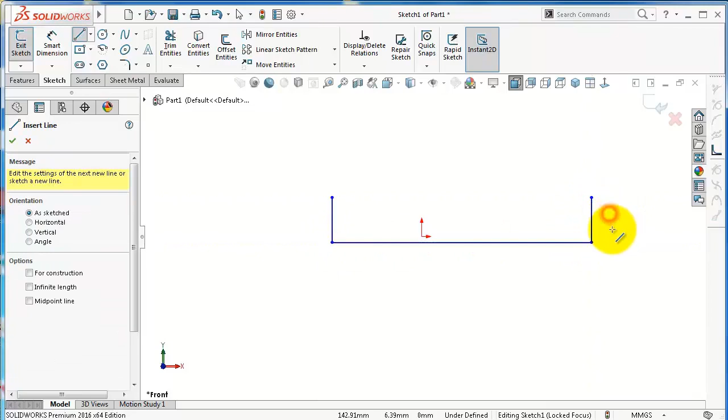For the bottom part, make midpoint and dimensions: 80, 9.25. This side is equal to this side.

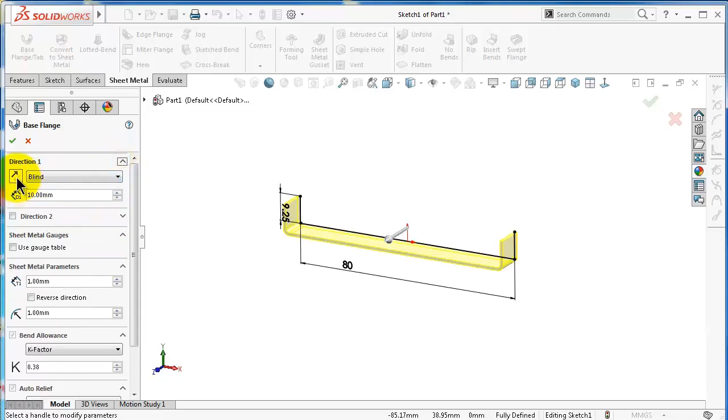Now go to sheet metal, base flange, and extrude it for 150, thickness 0.75, bending radius 0.25, K factor 0.38.

And the relief rectangle - these are the basic information and it will be used automatically for the next features. When we are done, click OK. So this is steel, and here in the appearance we can make it brushed steel.

On the base flange, let's just make sure that the base flange is outside, as you see over there.

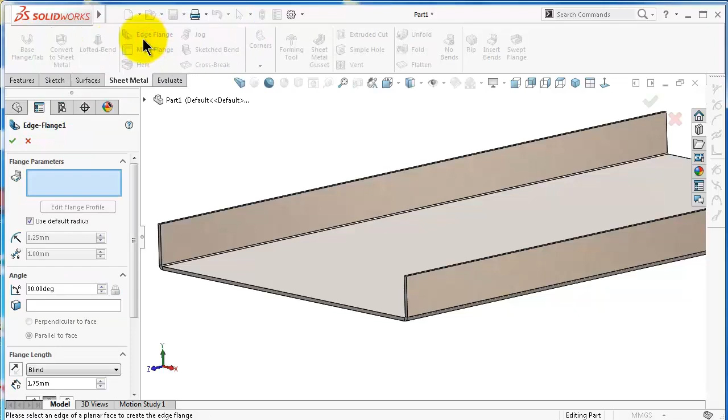Now we need an edge flange on this side. Go to edge flange, select this edge and make it a length of 38.75, and make sure the flange position is inside, as you see over there.

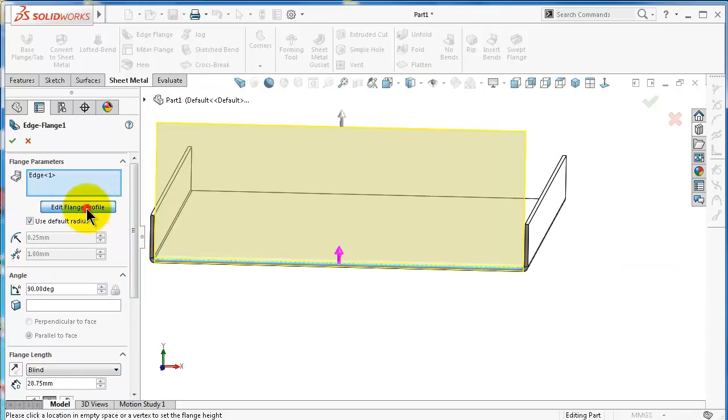And here the relief is rectangular. Edit the flange profile and give it a distance in this line to this line of 0.8. The same over here.

And this side is 38.8. And before finishing the sketch, we can do one more thing. Instead of making it a separate command, we would like to make a cut over there for another edge flange.

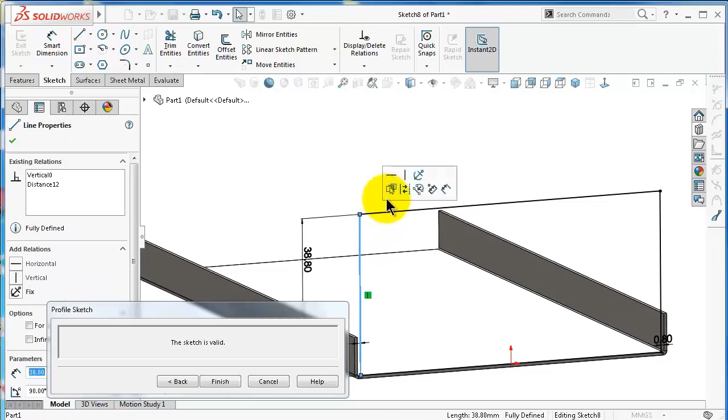So click on that line, make it for construction, and this line make it for construction as well. Normal To, and draw these two lines and give it a dimension of 12, 11.75, and here 0.8, then connect the rest of the lines.

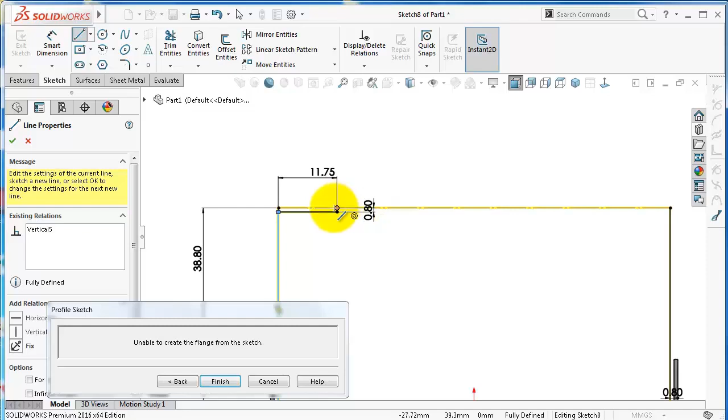So you notice the sketch is valid. Click finish. So now we have the edge flange with a relief over there and the cut here.

And here we would like to make another edge flange. Pick edge flange and select this edge. Edit flange profile Normal To. Here the dimension is 8 millimeter.

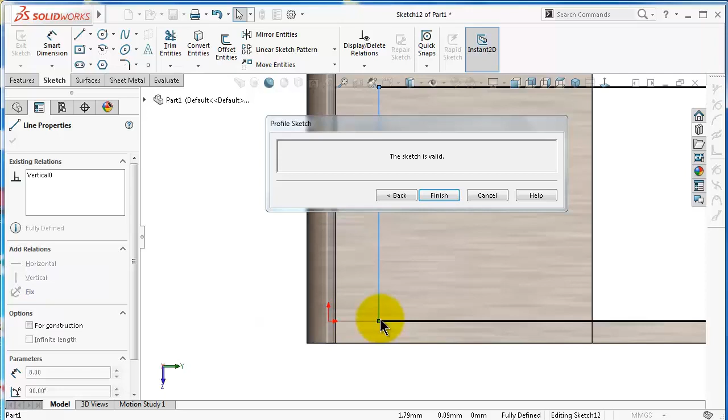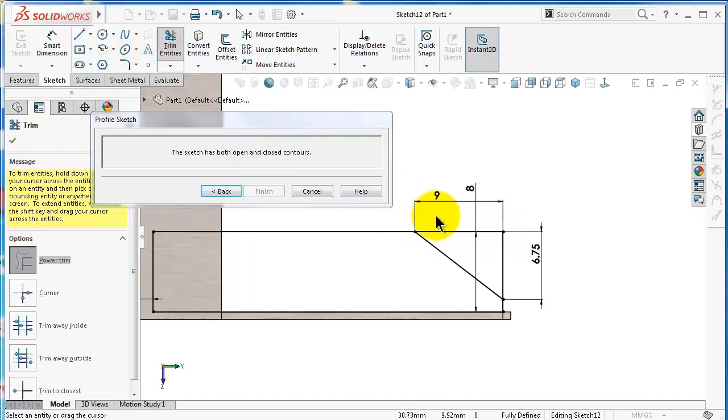And here make a gap of 0.8 millimeter. And we would like to make a cut over there, 6.75, and this distance is 9, and trim the rest. When you are done, click finish.

Just make sure that the edge is material outside. Click OK.

And here we need another edge flange. Select edge flange, select this edge, and edit flange sketch normal 2.

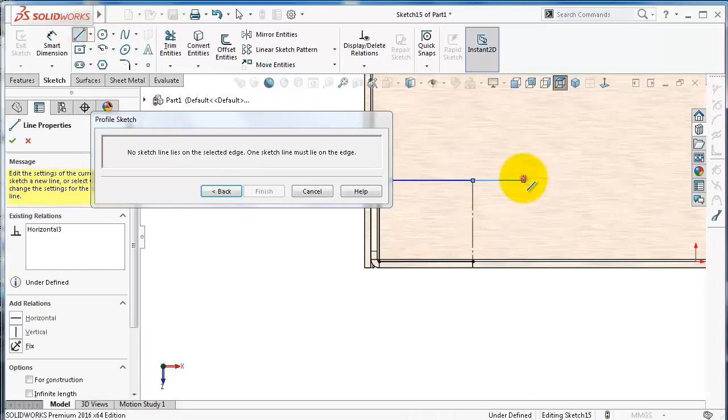The place of this line is correct, and let's make this for construction and draw another rectangle over there.

Make a gap of 0.8, and this line 1.25, and this distance 15.5, and this make 10.

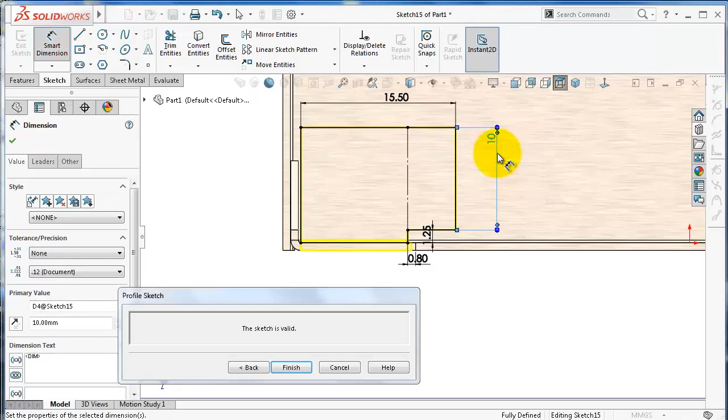When you're done, click finish and make sure the edge is material outside. Click OK.

Need a miter flange on this side. Click sketch normal 2. Pick a line and draw this shape, and give it a dimension of 45, 4, and here 10.

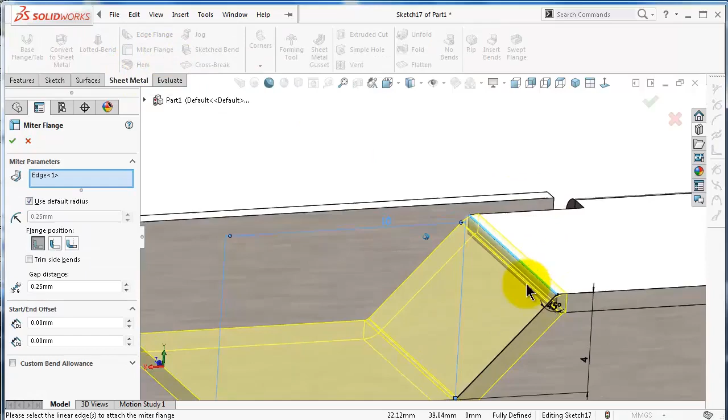Go to sheet metal, miter flange, and you will notice it is extruded automatically to the edge. Click OK.

And here on the main edge flange we need more cuts. We can make them on the face, or we can edit the main sketch over there, so depending which one is easier, you can choose. I can again pick the main edge flange, edit, normal to add some cuts.

And here, construction, and add another cut over there. Now the sketch is valid.

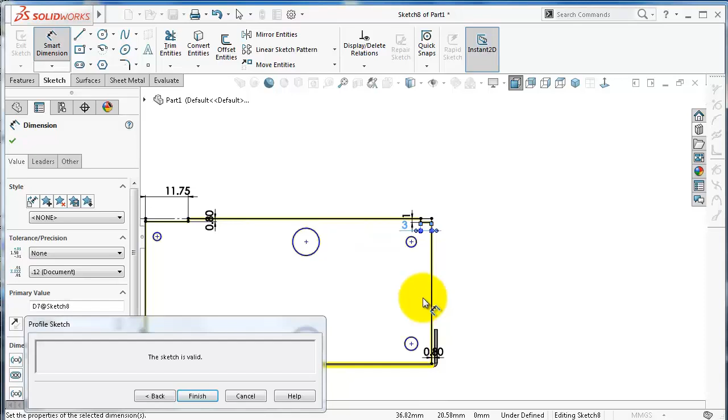Here make 1 millimeter, here 3. This one make it 2.5, and this 3.5. Distance from here, this one 25, and from this distance to here 4, and here 4 as well, and then you can add relation to define the sketch.

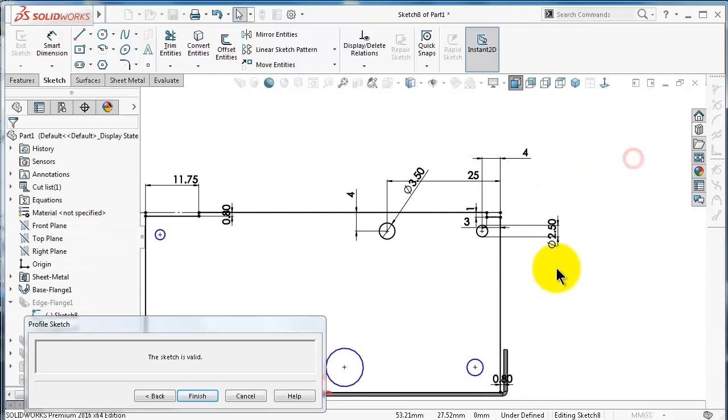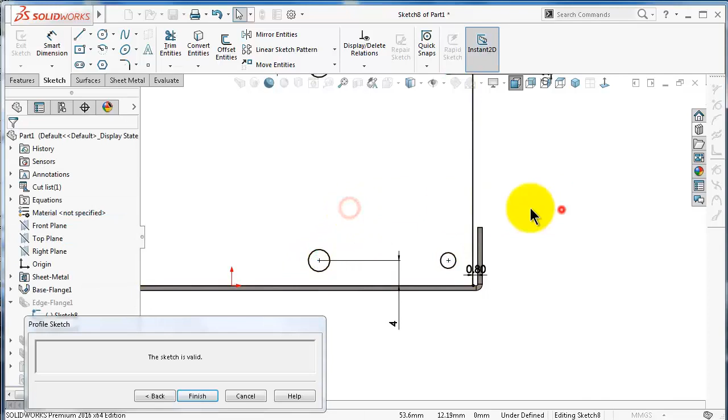So now the sketch is fully defined and we have the cuts. Click finish. We could also do the same by adding a simple hole, but it might be easier to make it on the same sketch.

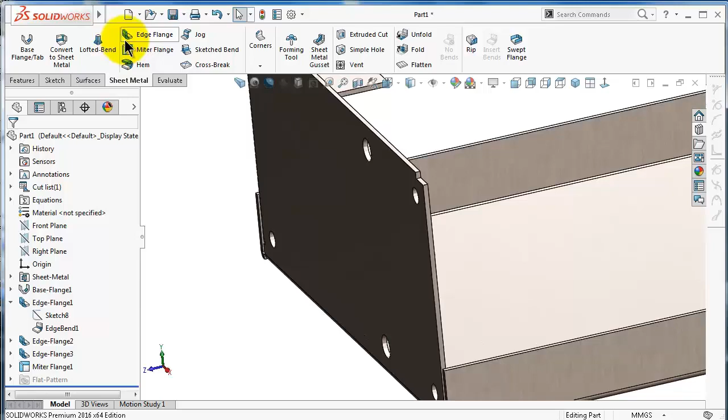And here add another edge flange, edit the sketch normal to, and then make a gap, define it with 2 millimeter, and the length 30 millimeter. Click finish. Let's make sure that is outside.

Again, edit and make it material outside. And here we'll add a fillet for this sharp edge. Go to fillet and make a 2 millimeter fillet over there.

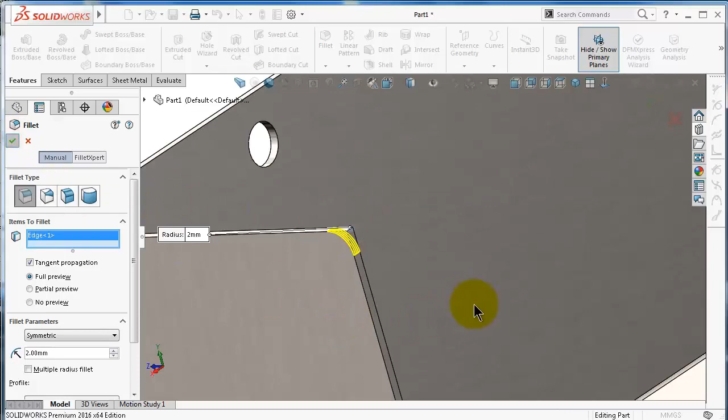And now we will make some holes for fixing the second chassis, the top chassis. Click on this plane, sketch, normal to, and draw a circle over here, 2.5.

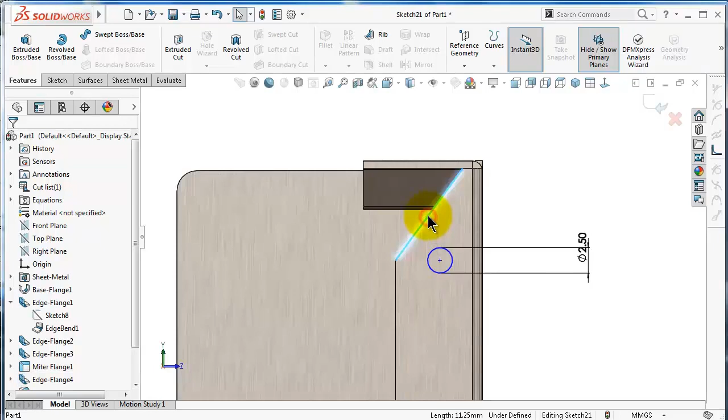Select this point, this point. Here select midpoint, or it is already selected. Select this edge, select midpoint, select this, make them vertical.

Go to sheet metal, extrude cut through all. Click OK. And here we can add one more hole by drawing a circle or simply linear pattern.

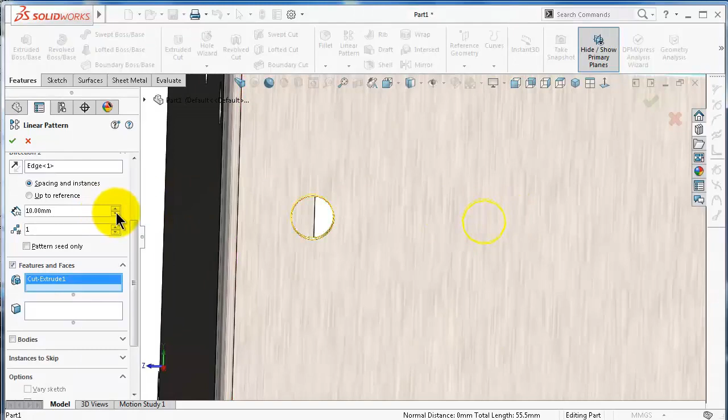This hole direction is this edge over there, and quantities to feature this hole and make it 10 millimeter over there. Click OK.

And now we need a similar edge flange on the other sides. So first, let's make sure that the first edge flange is mid-plane extruded, edit feature, and here make it mid-plane. So this process will save us from creating a new plane.

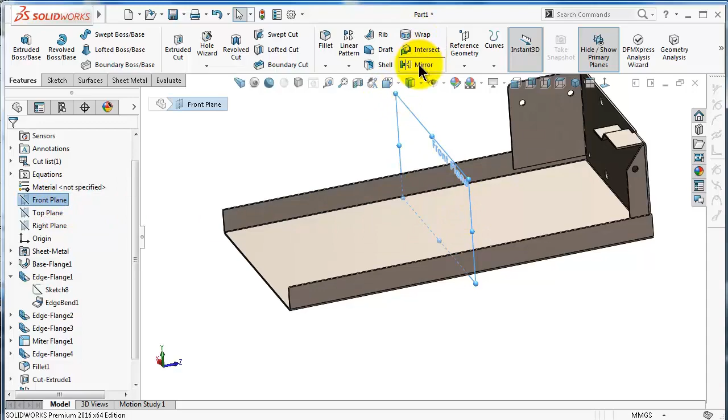Go to front plane, mirror, and let's pick the edges that we want. First, we need this edge and this edge, and that's it. Click OK. So the edge flanges are able to be mirrored.

Unlike other features in sheet metal, they cannot be mirrored and should be created individually. We discussed this in the previous tutorials in this course.

And on the top there, we will add a 3.5 millimeter edge flange. Go to edge flange, select this edge, and make sure the material outside. The length is 3.5. Click OK.

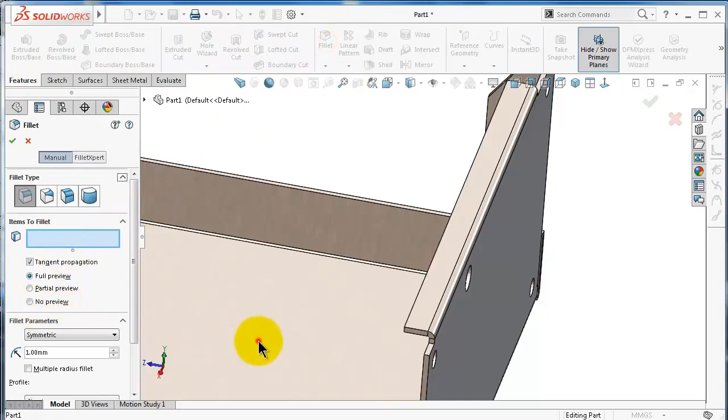And add a fillet of 1 millimeter around the sharp edges. Feature fillet, 1 millimeter. Okay.

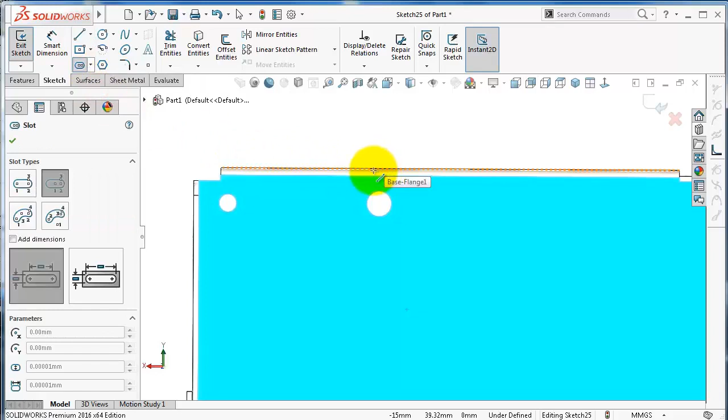And here we would like to make a cables hole. So let's draw a slot, center point slot, and make it to be in the center of, and here make a dimension of 10 millimeter and 10 millimeter over there, and here make it 16 millimeter.

And one more cut to add. Select center rectangle and make a rectangle over there, tangent with this edge or collinear, and this one is 27.5.

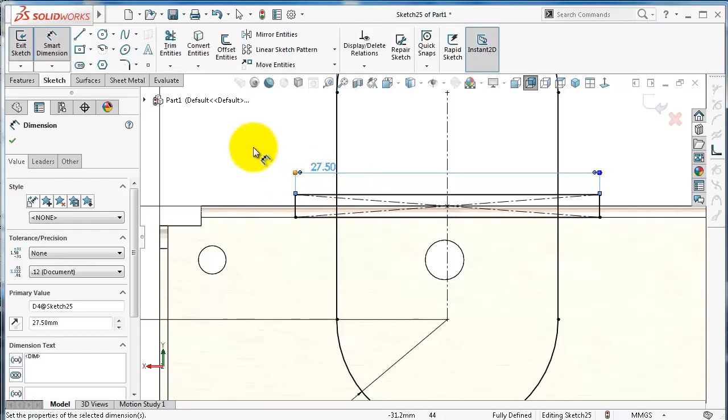So extrude cut, sheet metal extrude cut, select this area and this area and this area, extrude cut 10 millimeter, and here we can make the distance from the center of the slot and the edge 27.5, so that we have chance to make another cuts over there to fix the second chassis or the top chassis.

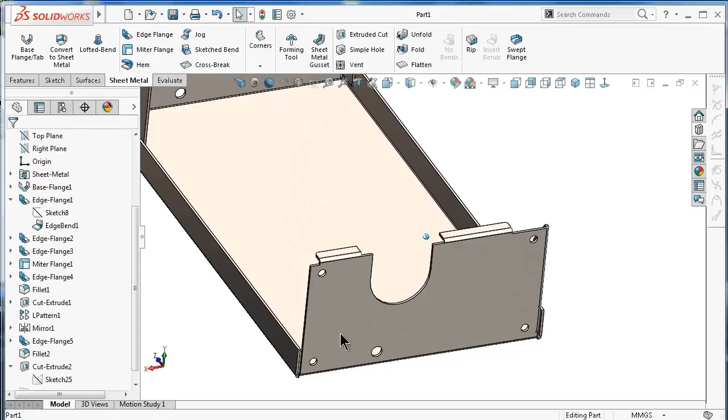And here we would like to make some ventilation slots. Click on vent, click on that face, make a sketch normal to, select center slot and draw slot, and define it with some dimensions, radius 1.25, and this is 6.5, and from this edge to this edge 7.5, and from this point to this edge also 7.5.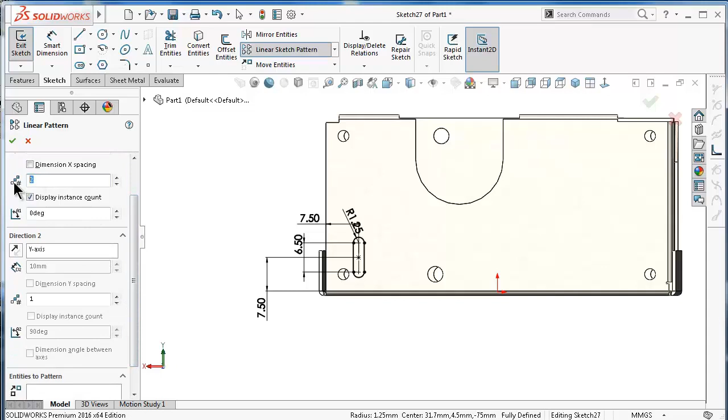Go to the, and here go to linear sketch pattern, and we need to fill that surface with slots. So let's make the 7.5 the distance between, and let's make it 10 instance or entities to pattern this slot.

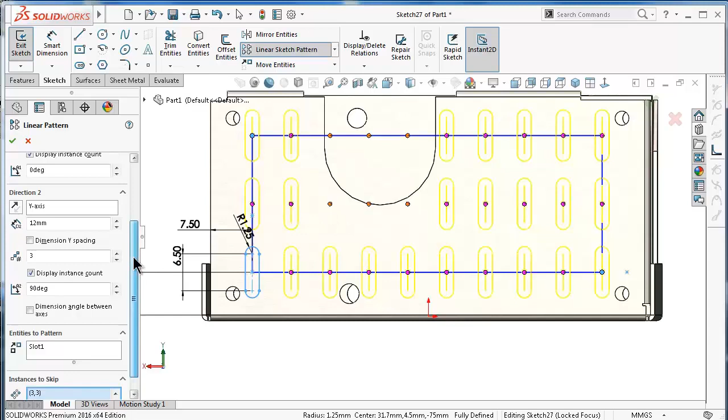So here the distance we can make it 7, and in direction 2 we can make 3 lines of pattern, and the distance we make it 12, and we can skip the unwanted pattern, this one and this one. Here we can try to make it 7.1. That looks better.

So we can skip more instances over there. Can skip this slot and this slot, and make distances 7.5, and we can skip this one over there. When you are satisfied with the shape, click OK.

Now add a little dimension over there, and over there, that would define the pattern. Click OK. Now the pattern is fully defined. Go to sheet metal, extrude cut, link to thickness. Click OK.

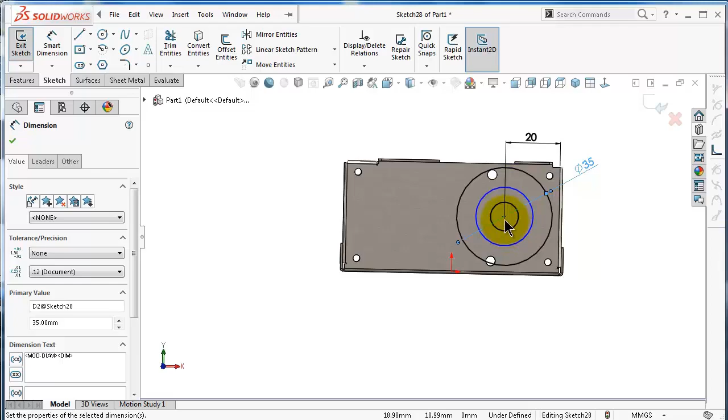On the other side, we will make the ventilation hole. Click on that face, start a sketch, normal to, and draw 3 circles. First, make a distance from the center of the circle to the edge 20 millimeter. Select midpoint and the center, make them horizontal. Here the outside diameter should be 35 and this distance between the center to the edge is 20. So we need to fix the place of the hole over there.

Go to normal to, and here make it 35 instead. So let's check. So now it is correct.

So again, edit the ventilation sketch, normal to, and here should be 25 and the last circle 15.

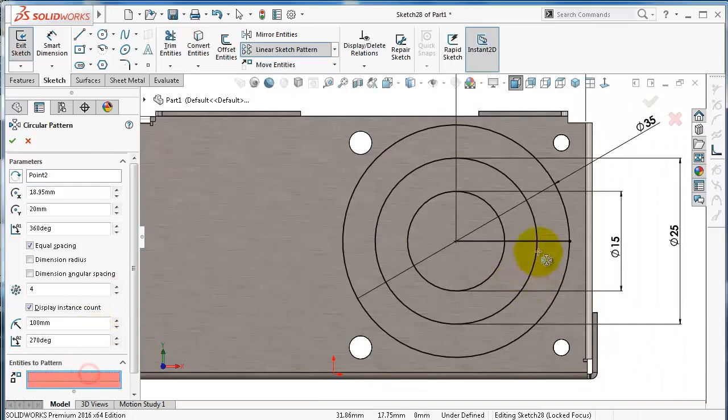Now let's make lines for the spars. Select line, select center point to the outside circle and circular pattern the lines. So the direction or the center of circular pattern is the point over there, and entities to pattern this line and make them eight. Click OK.

Now go to sheet metal, vent. As we learned how to use it, the boundary is the outside circle. As you notice now, it is already got a cut, and the ribs, let's make the...

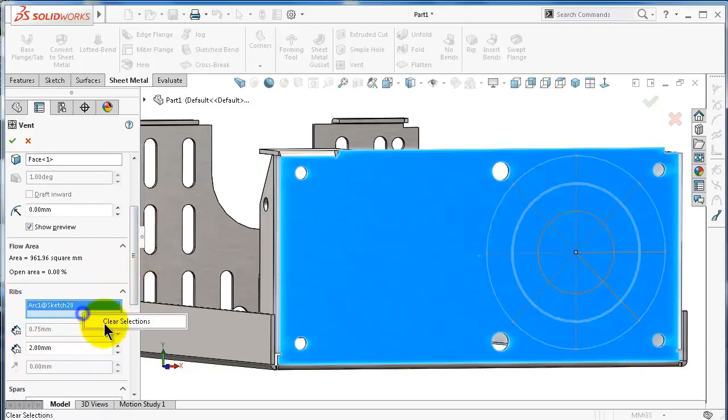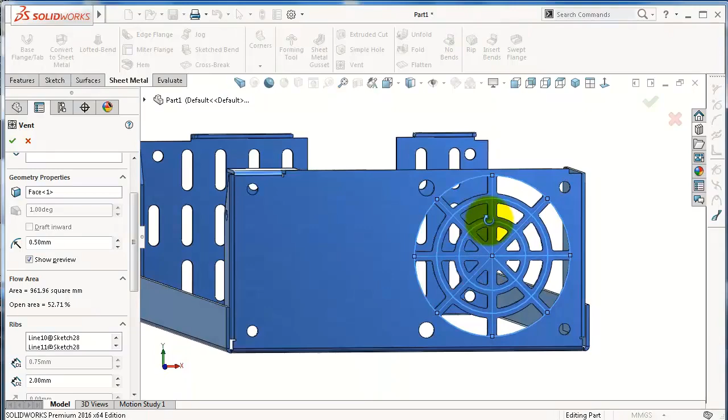And the ribs, let's select the lines, and for the spars we can select this circle and this circle, and we have 2 millimeter spars and 2 millimeter ribs, and define a fillet of 1 millimeter, 0.5, and click OK.

And hide the sketch. So this is the ventilation.

Now we will make some mounting holes on this chassis to mount the second chassis. Go to this surface, start a sketch, normal to, and draw 3 center point rectangles in the middle of each edge, and a third one over here. Make the edges of rectangles equal.

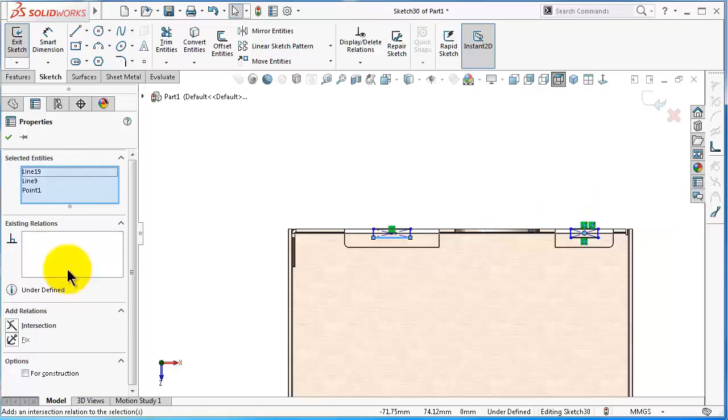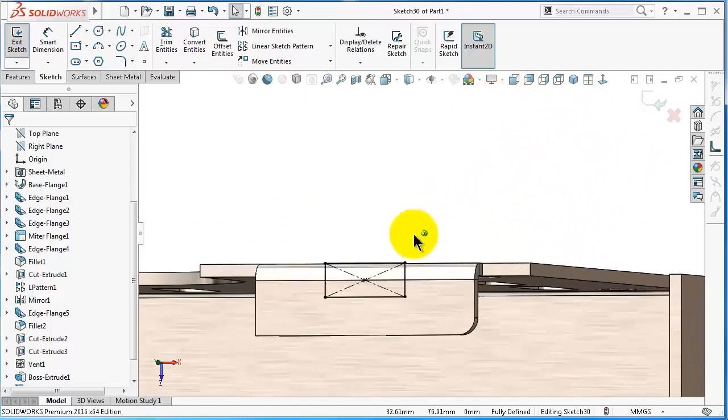Give it a dimension of 5 millimeter, and the second side of the rectangle is tangent or collinear with the edge of the chassis, as well in the rest of rectangles. So now they are fully defined.

So extrude them. Go to sheet metal, extrude cut to this surface. Extrude to surface and select that surface. Or better, this surface over there. Click OK. So now we have the mounting holes over there.

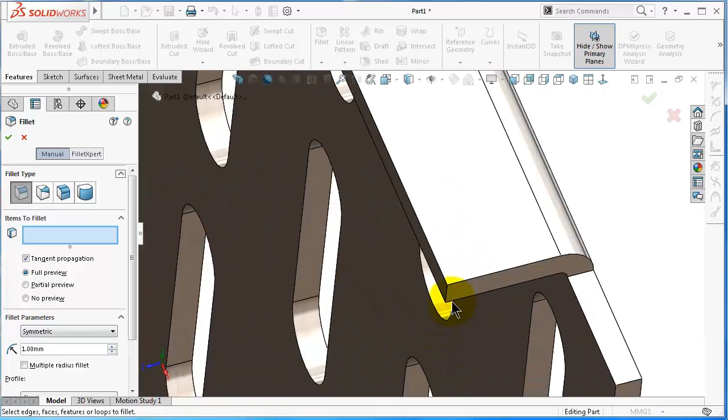And here we may need some fillet for the sharp edge here. Go to fillet, 1 millimeter. Click here and in this side. Also you can add fillets over here. Click OK.

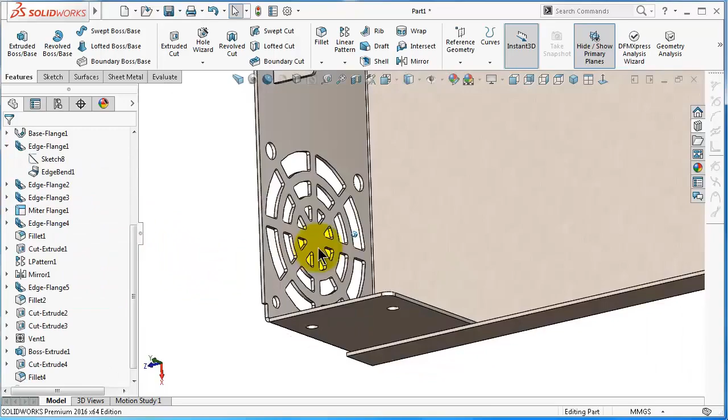So now we'll see the final touches. Now we need more edges. Here we need another edge flange. Go to sheet metal, edge flange, and select this side. And it is already material outside. Edit, make it normal too.

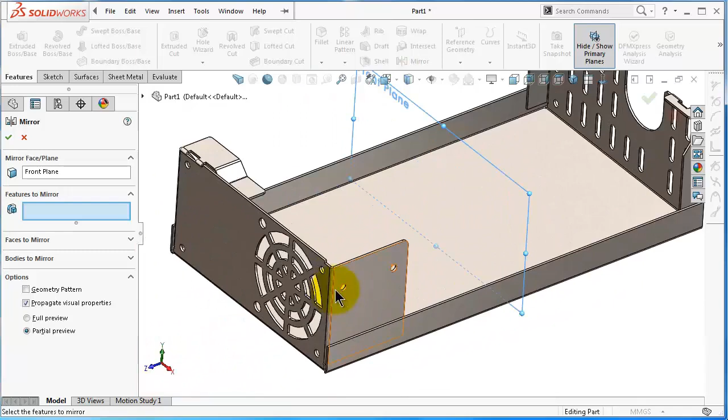Now we can mirror the holes as well. Select front plane, feature, mirror, click OK.

And one last thing, we need a socket hole over there, normal to center point rectangle. Give it a dimension of 27 by 19, and a fillet of 3.5.

Okay, and dimensioning, make it 17.5, and this point to this edge as well 17.5. Click OK, go to sheet metal, extrude cut, link to thickness, OK.

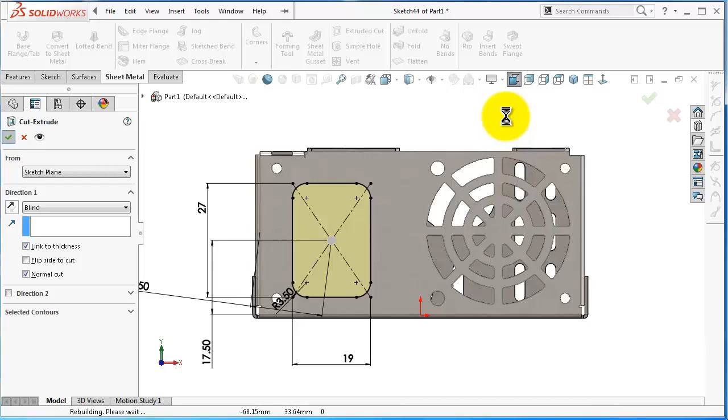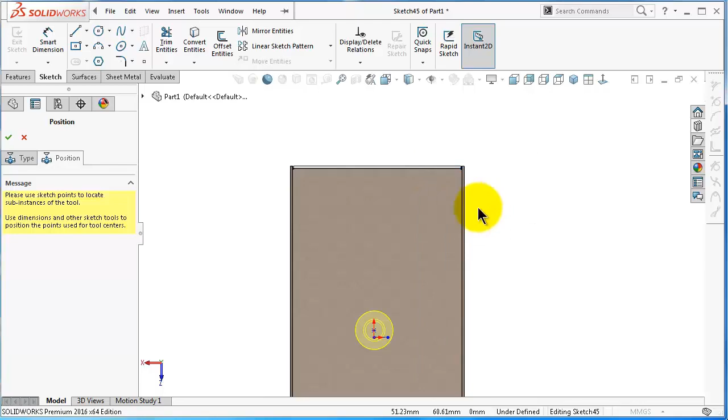Make sure it is in the right place. Select midpoint, and this point, make them horizontal, and as well over here. Select midpoint, and this point, make them vertical. Okay.

For the top chassis, start a new part, click, go to the front plane, start a sketch, and draw this shape.

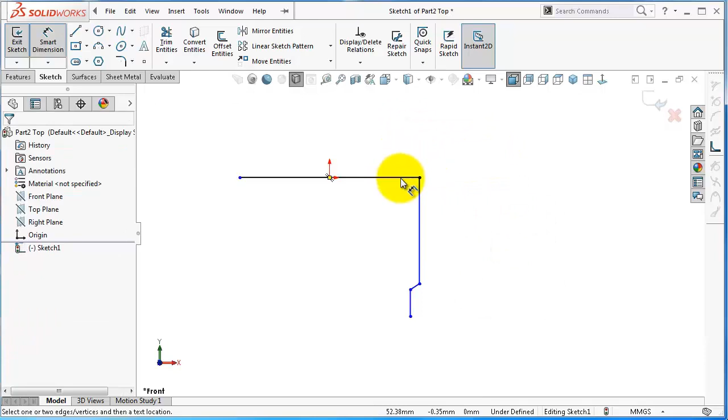Make this point with the line midpoint, give it a dimension of 80 millimeter, and here 30, the angle 115, in this gap 0.75, and this edge 5.4.

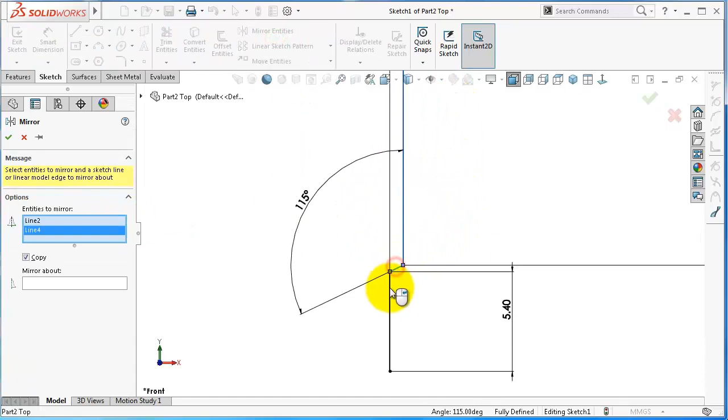We can mirror the same lines on the other side. Go to mirror and select these three lines, mirror about the center line here. Click OK.

So here we have the base of the top chassis. Go to sheet metal, this flange, and extrude it to 150 on the other side, and here you will have the same sheet metal configurations from the previous part, 0.75, and the rest of the values. Click OK.

And for the appearance, we can add brushed steel, and also we can add a material over there, stainless steel sheet, apply, close.

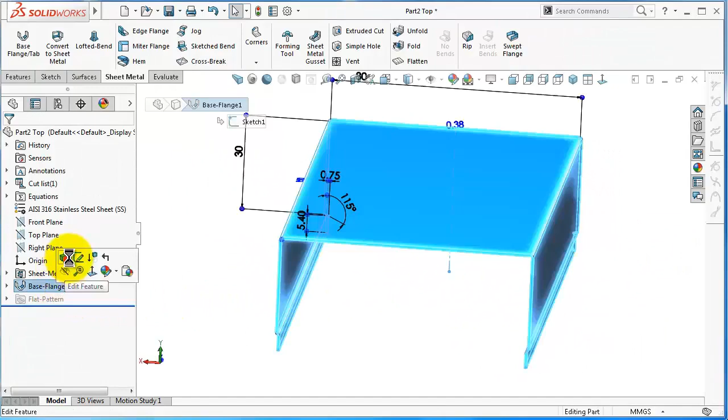So here is the base shape, and let's just make sure that the side of sheet metal is outside the sketch, as we notice over there. Click OK.

We can make one thing to make it easier to follow, so that the top chassis is matching the bottom chassis. We can start an assembly and work in the assembly mode. Click OK.

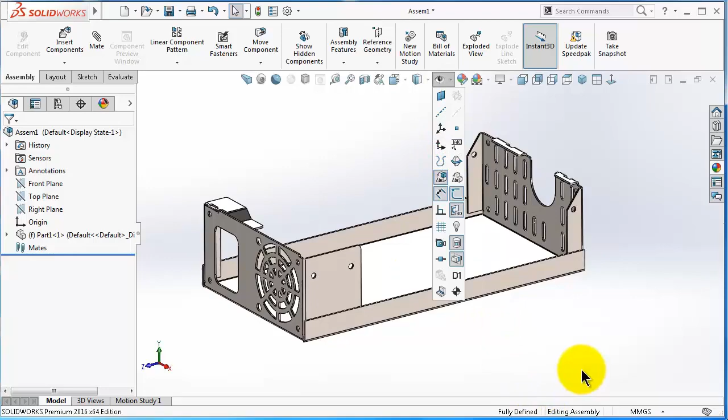And here show the center point and drag part 1 in the center. So now we have the chassis is centered. Hide again the center point. Let's mount the top part.

Select top part, and here we can make this side coincident to this side, or we can make this line coincident to that face. Click OK.

Now let's make this one coincident. Click OK. So now we have the basic shape is matching the top chassis, and here we can make some modification.

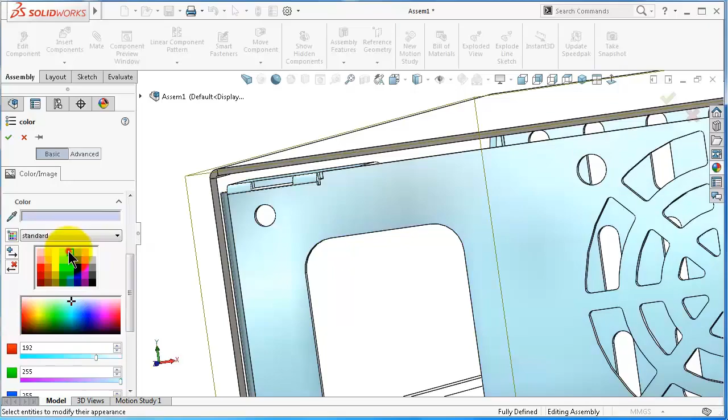We can change the color of it to make it easier to see. So here in the assembly mode, it can be easier to check for matchings. So we can go now, try to close the gap.

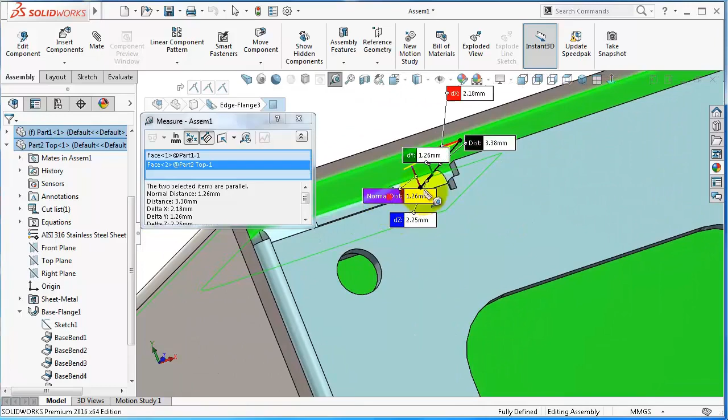If we go here normal to, you'll see there is a little gap. Over there we can measure it and close it, and measure the gap between this face and this face. You see the normal distance is 1.26.

So go to the edit part and edit sketch. And here we can make it 30 minus 1.26. Rebuild. Now it is matching, and here we need to make the material inside. Edit part.

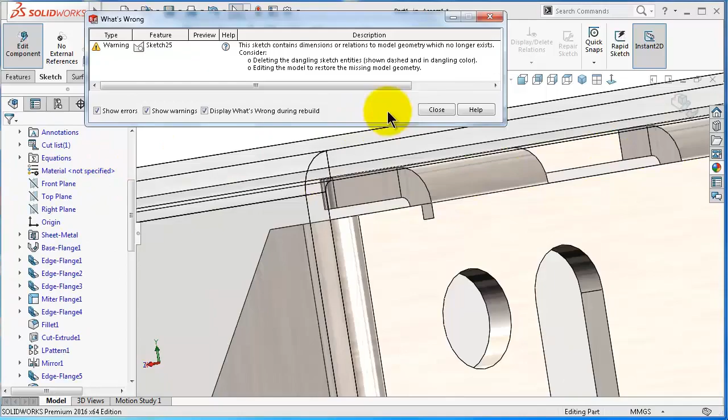Click OK. So now we have the two sides perfectly matching with the top chassis.

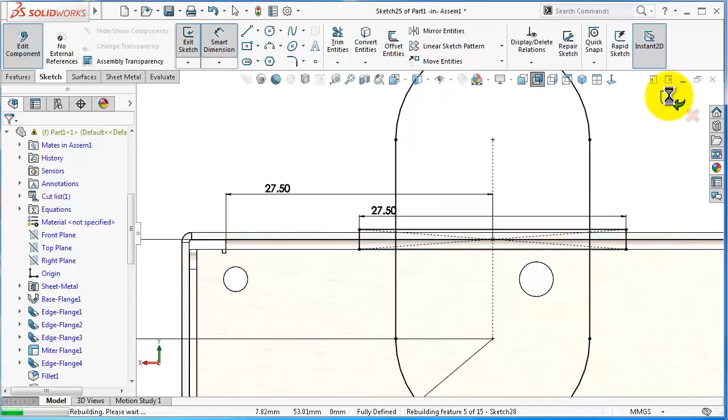Normal to, and another dimension. Click OK and exit the sketch.

Now we don't have any warning, so let's continue modifying the top chassis. Here we need—if we change the transparency, we can notice that we need some cuts.

So let's try to create that cut. Select that for edit part. Normal to, start a sketch on that face, and draw a cutting rectangle.

The same on that side. The two sketches are fully defined. Now go to Feature, Extrude Cut through all, so it will cut only on the top part.

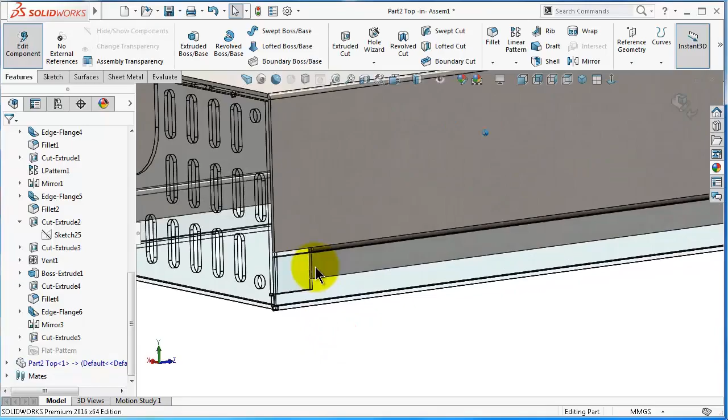And here we need an extra cut for that edge. Start a sketch, normal to, and select again a rectangle from this point to this point, and this line with this line. Collinear, Feature, Extrude Cut, up to next.

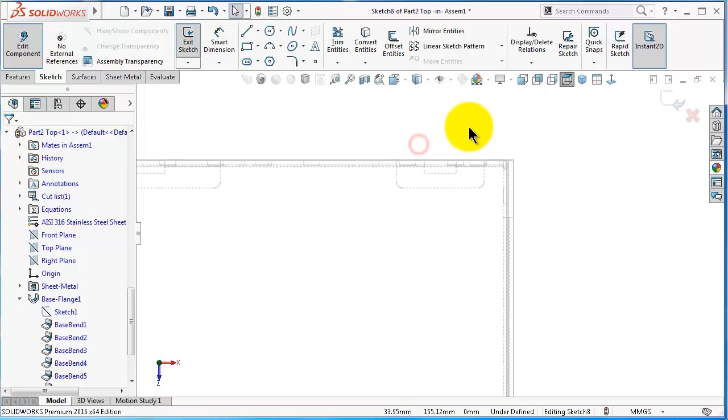And here on the top, we need more cuts for inserting a mounting teeth. So go to the top plane, start a sketch, normal to, and here we can show the rectangles that we need. Select center point or select a rectangle and draw a rectangle for that cut, and one over there, and a third one in the bottom.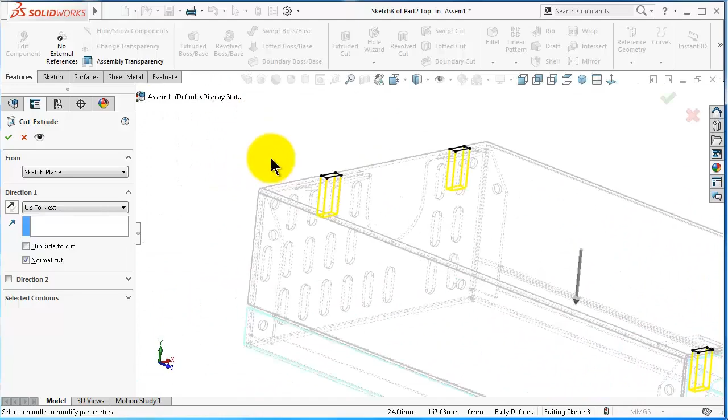Go to Feature, Extrude Cut, up to next. Click OK and change the style of the material. Now we can see that we created a cut for the mounting teeth.

Now we need to insert an edge flange over there. Go to Sheet Metal, Edge Flange, and select this. And we can make it the distance 3 or 2 millimeter, and the material we can make it bend outside, and select the rest of the edges.

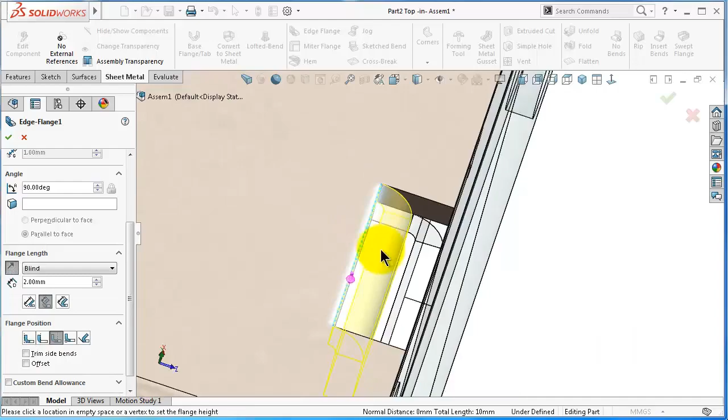So that is the mounting teeth to mount the top chassis. Click OK. And now more things to add: we need holes to fix on the edges.

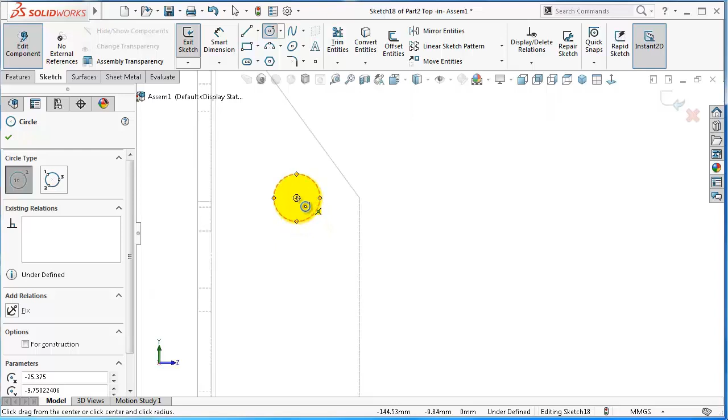Start a sketch in there, normal to, change the style of the material, and draw circles matching the others, and we can fully define them. They are already matching the holes on the bottom chassis. Go to Feature, Extrude Cut through all, click OK.

Change the style of the material, and you'll notice that we made perfect holes matching the base chassis. So now the top chassis is almost fixed. On the bottom chassis, we have the screws over there, and we have the mounting teeth or tabs over there.

And one last thing to add is ventilation holes on the top, similar to the one on the side over there. Click on the top plane, normal to, and draw a center line, and draw cutting slots.

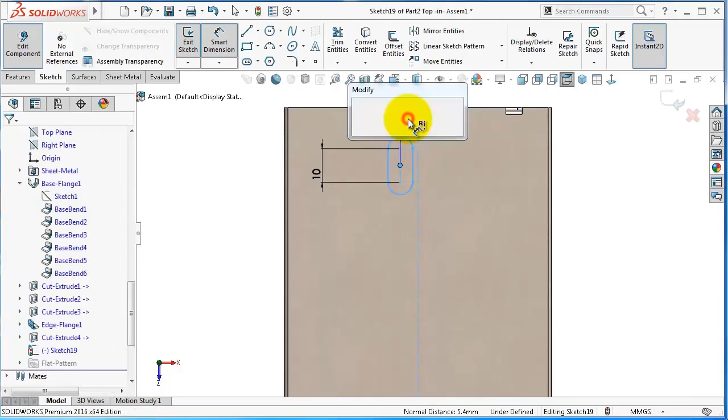Then, from here to here, 5, and the radius over there is 2.5 by 2, so it is 1.25, and the distance from here to this size is 21.5.

So now we need 3 lines of these slots and 7 pattern to the left. Go to linear sketch pattern. On the x-axis, make it 7, and on y-axis 3.

The distance should be 5 on the x-axis and 16 on the y-axis. Entities to pattern is this slot. So here we can change the directions.

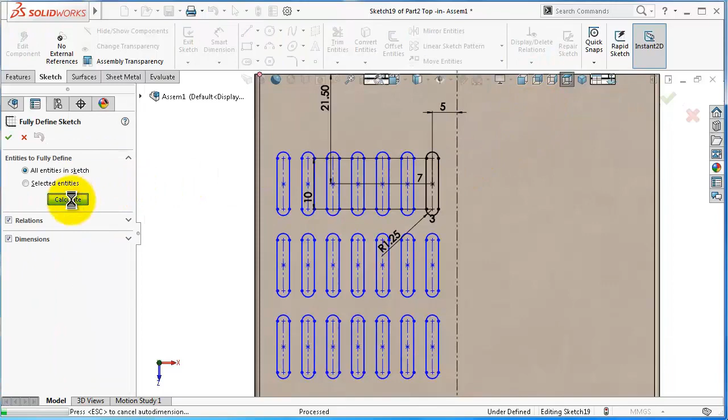Click OK. And here we can try to fully define, calculate, so remove the relation, so it will be a bit easier. Click OK.

Now mirror the slots on that center line. Click OK. Now go to sheet metal, extrude cut, link to thickness. Click OK.

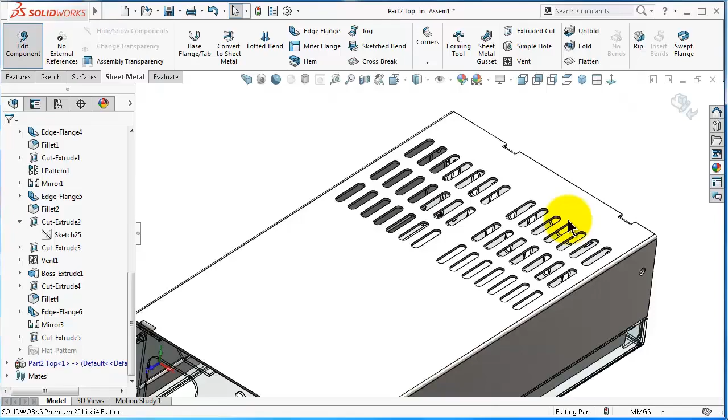So now we have the ventilation slots ready, and the shape of the power supply looks better. Now exit that part.

So change the transparency and again return back to the main color of this. So here we have the final look of the power supply. Save.

All, and now we can go to this part, open part 2, and try to flatten the part to see. Now we have the part which we need to cut to create that power supply.

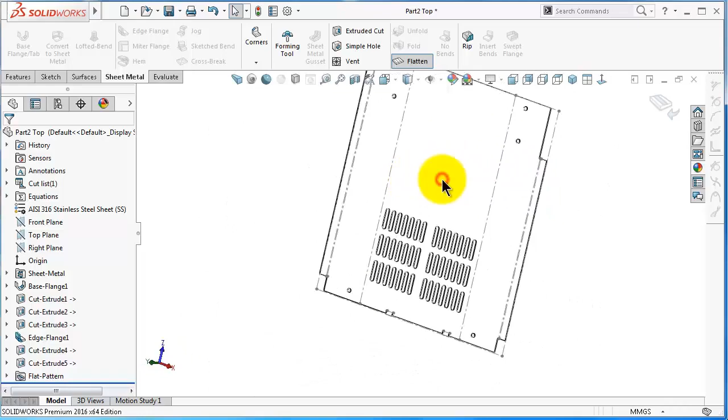In the next tutorial, we will see how to create a drawing to send that part for manufacturing, and what is required in sending sheet metal drawings in order to understand the bending process and where to bend. So the next tutorial will be the last tutorial in this series, and it is about how to create a drawing for manufacturing the parts. We'll make this example in order to show you how to manufacture or produce it by sheet metal processes.